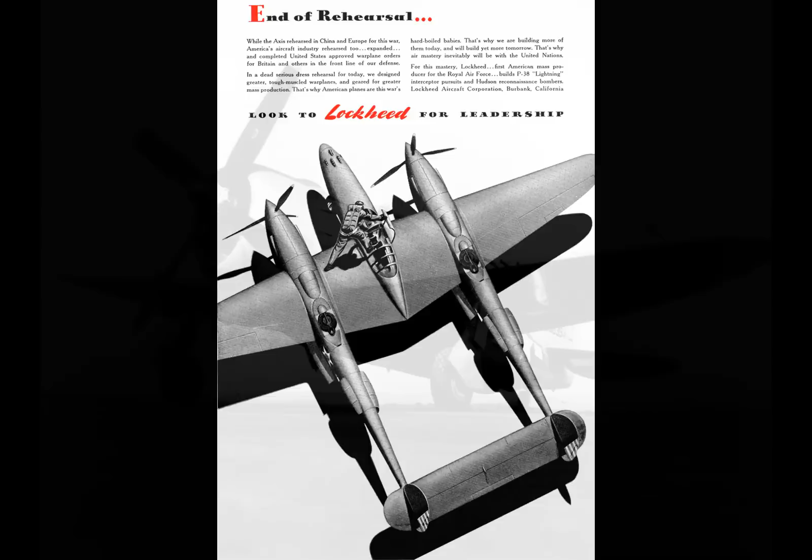The U.S. Army Air Force had numerous fighter planes during World War II, but only 3 that were really capable of escorting the U.S. heavy bombers and taking on the Luftwaffe at high altitudes. The first of these was the Lockheed P-38 Lightning, followed by the Republic P-47 Thunderbolt, and finally, North American's Merlin-powered P-51 Mustang.

Of these 3 airplanes, not surprisingly, the P-38 was the most expensive. The cost alone called into question the wisdom of purchasing the plane once the lower-cost alternatives were proven.

A new P-38 in 1944 cost about $97,000. A P-47, which could do about as well or better in certain roles, cost $85,000. A P-51 in 1944 was only $51,000. Compared with the P-38, the P-51 is almost half the price, with far lower operating costs and easier pilot training.

Thus, from early 1944 on, just the act of buying P-38s could be seen as somewhat controversial. However, it's more than that. The plane had a number of technical issues which added to the controversy. Add in the fact that during 1944, the 8th Air Force replaced all their P-38s with P-51s, and the plane's reputation took quite a hit.

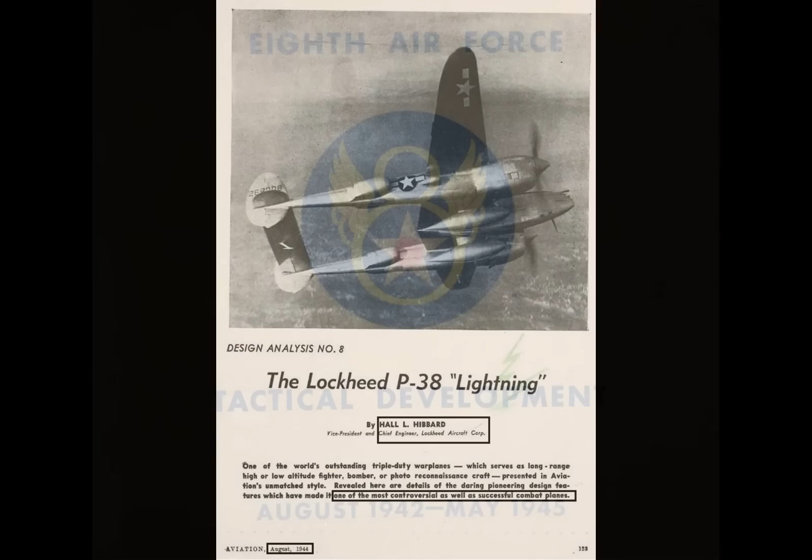Hall Hibbard, the vice president and chief engineer at Lockheed, referred to the P-38 in this article as one of the most controversial airplanes. Take a look at the date. This was in August of 1944, so he wrote this at a point in time when the P-38s were being rapidly replaced by P-51s. The 8th Air Force Tactical Development Book has a chart which gives you a pretty good idea how quickly the P-51s took over the role from the P-38s in that theater.

So all this looks pretty bad for the P-38. It's really expensive, had significant technical issues, something I'll circle back to, and the famous 8th Air Force didn't want them. What's not often remembered is the fact that the Merlin-powered P-51s didn't start operating in significant numbers until early 1944.

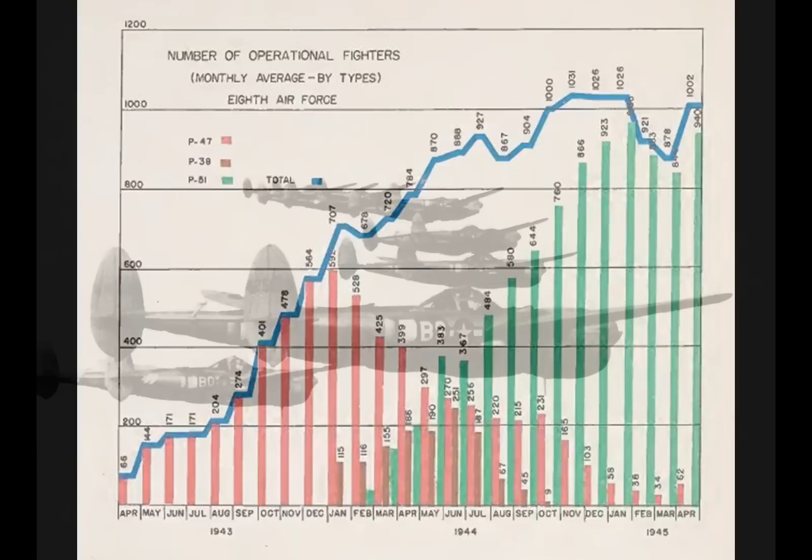They didn't outnumber P-38s in the 8th Air Force until April of that year, only 2 months before D-Day. By that point, the course of the war had already been set. Most turning points in the war happened in 1942 and 1943, and for most of those turning points, the P-38 was there.

During these years, U.S. commanders were asking for more P-38s. So while everyone seems to remember the 8th Air Force getting rid of them, few seem to remember that for most of the war, U.S. commanders were screaming for more P-38 Lightnings.

Hap Arnold was not only trying to get P-38s for his operation out of the United Kingdom, he was literally trying to get every single P-38 that was built. When we combine that with the fact that we know there were P-38s operating in other theaters, I think it's obvious that the individual theater commanders were all trying hard to get P-38s of their own.

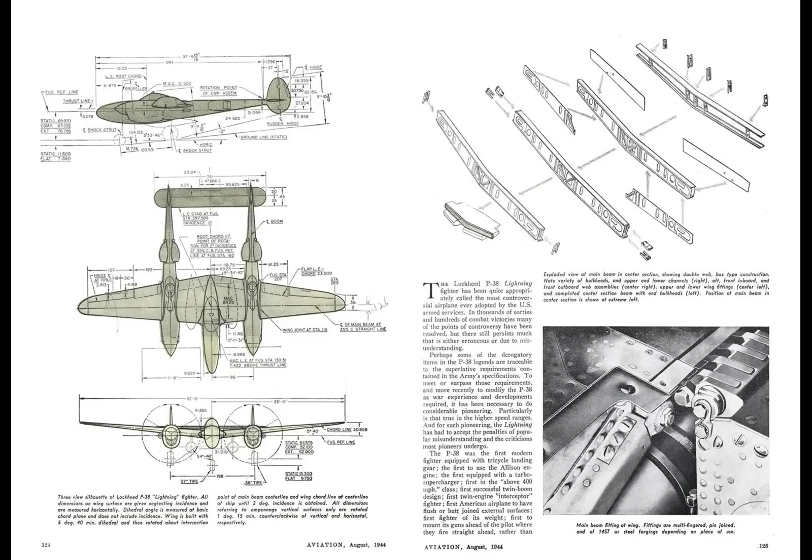Now let's go back to that Hall Hibbard article for a moment. I think he makes some very valid points about the 38's problems. I'm going to paraphrase this, but I'll put up the actual text on screen for you. Let's zoom in so you can pause and read if desired. Of course, this actual magazine and other documents in this video are in my Patreon section in PDF format.

Hibbard is pointing out that because the P-38 was the first fighter to reach 400 miles per hour, and to be capable of high speeds at very high altitudes, it required new technologies and techniques in construction to do it.

It's not unusual for new technologies or techniques to run into technical problems, as well as become a target for undue criticism. First on the list of problems is the P-38's high parasite drag. I talked about this in the previous video on the plane, so I'll just gloss over it here.

The Lightning has high parasite drag as compared with other U.S. World War II fighters. That's because after the P-38 first flew, NACA came out with a lot of new information that benefited the P-47, the P-51, the Corsair, and even the Hellcat. In the last video, I talked about the drag from the turbo installation, the exposed turbo itself, and the collection of related cooling scoops, which are all over the plane.

We also have drag from the wing. The wing was pretty good in terms of induced drag, which helps it at lower indicated airspeeds and in turn radius. But it has a lot of parasite drag, which hurts it at high indicated airspeeds, and that's a big factor at lower altitudes.

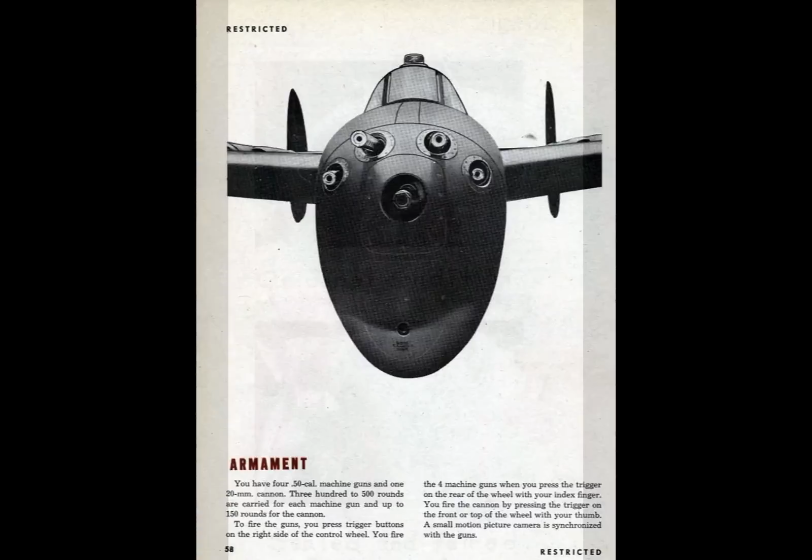We also have some very high drag gun ports. This open gun port arrangement was common when the P-38 was designed, but these cause a lot of drag. NACA figured this out, and the drag from gun ports was minimized on future designs. The P-51's gun ports look a lot like what NACA came up with here, and that's not a coincidence.

Thus, I suppose, rather than saying that the P-38 has high drag, it makes more sense to say that the other planes have lower drag because they benefited from information that wasn't available at the time the P-38 was designed.

That power evens out most speed contests, even down at lower altitudes. It's just that it's not as fast as it would have been otherwise.

As an example, and I'm going to use the P-38G, that plane came out in mid-1942. It was heavily used in the Pacific. It's the variant that got Yamamoto. Commonly used airplane in 1942.

The P-38G's speed at 5,000 feet, which is a low altitude, is within around 5 miles an hour of most anything else that was flying at the time. It's just that the P-38 was using a lot more power to get that speed because of its drag.

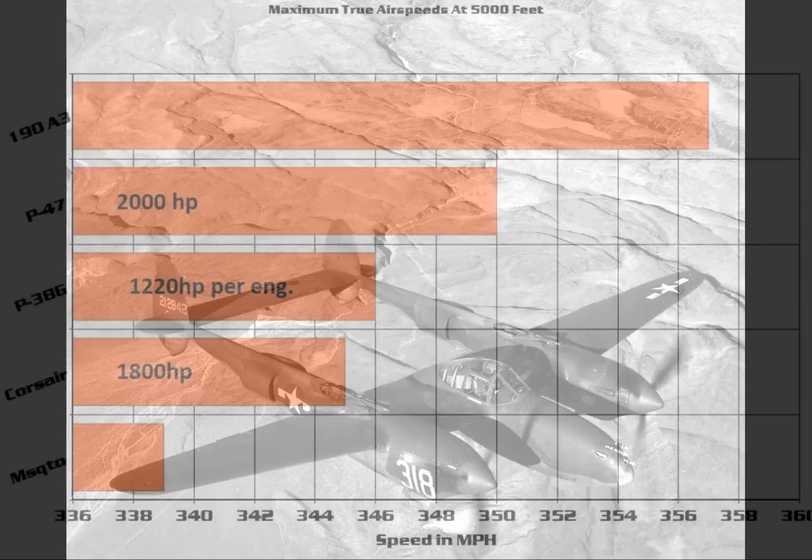To keep things in context, I'll put up a chart I made for a P-38G model versus other 1942 aircraft. Now keep in mind there are later and faster versions of each plane here. I'm trying to put up stuff from mid-1942. At 5,000 feet, all of these planes are pretty close in terms of maximum level flight speeds.

They range from 339 to 357 miles per hour. The P-38, in spite of its drag, sits squarely in the middle of this range, and these are all fast airplanes by mid to late 1942 standards. And again, the 38G we're looking at here came out in July of 42.

The Corsair doesn't quite fit in, as it didn't enter service until very late 42, the 28th of December, but I thought it would make my point pretty well. At 5,000 feet, due to throttling, its 2,000 horsepower engine only has 1,800 horsepower. So I think this perfectly demonstrates the differences in drag. The P-38 needs 640 more horsepower to reach the same speed as the Corsair.

The Mosquito here has the Merlin 21. It is not the later variant with the two-stage Merlin. However, it is representative of a typical Mosquito in 1942. We will get to the dual-stage versions another time.

Let's take a look at speeds at 25,000 feet and see what happens. Up at this altitude, parasite drag is less of an issue because the planes will be at relatively low indicated airspeeds for a given true airspeed. Up here, not many planes can outrun a 38 in mid-42, and no Axis fighter could do it.

I think that's enough about drag. The takeaway should be that yes, it was high, but the P-38 was still pretty darn fast.

Sharp observers probably noticed already that on this chart I show the P-38 with only 1,220 horsepower a side, when the P-38G engines were rated at 1,425 per side. There's a little bit of variation on those ratings depending on exactly when you're looking at it. But this dovetails into the next problem I want to talk about, and it's a pretty big problem.

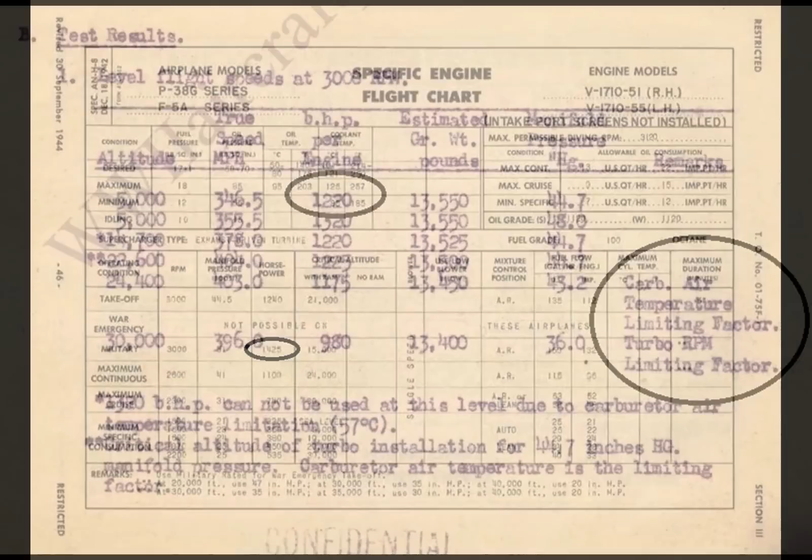In that test, they couldn't run more than 1,220 horsepower without running into carburetor air temperature limits. This problem would affect all P-38s that saw combat prior to the introduction of the P-38J in mid-1943.

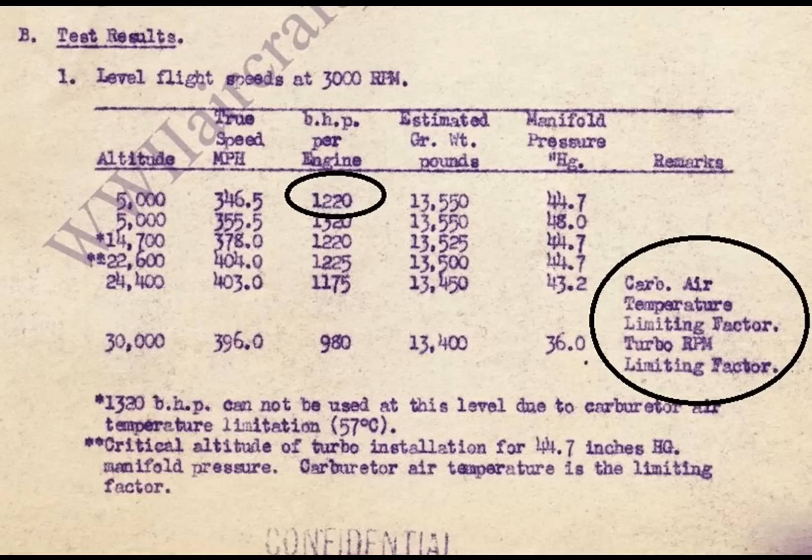Allow me to explain. Air coming out of the turbochargers is hot. I'll be calling that the charge air. It's hot for two main reasons. First, the turbo compresses the air, and when you compress air, it gets hot. The air also picks up additional heat from the turbocharger itself, as the unit is not 100% efficient.

It's a good idea to cool that air back down through the use of an intercooler. Lowering the temperature of the charge air increases its density, and that alone results in more power. Plus, it decreases the tendency for the engine to knock, which in turn allows higher manifold pressure and power for a given fuel octane rating. So, intercooling in a World War II airplane is a pretty important thing.

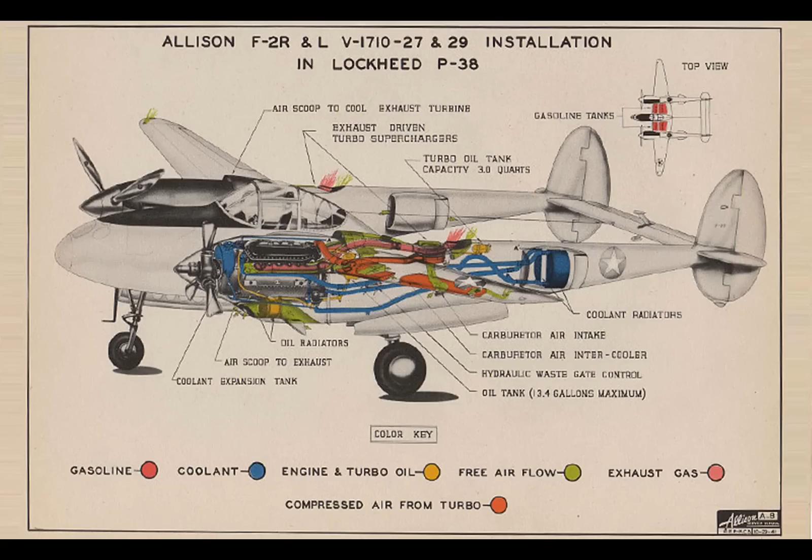The early P-38s have intercoolers built into the leading edges of the wings outboard of the booms. This design is clever because it eliminates the large external scoops that would normally be associated with an intercooling system, thus reducing drag. I think they use the aircraft skin to cool the charge air.

In other words, I think it's a skin-to-air heat exchanger. But I'm not sure of that, and I can't find a single explanation of how the wing intercoolers actually work in any document. But I don't see any external ducting that would support a conventional intercooler, either air-to-air or liquid-to-air. So I'm pretty sure that they use the aircraft skin to cool the charge air. But if anyone knows for sure, please post in the comments, especially if you have a source.

The problem with the P-38's intercoolers is that they were designed for the 1,150 horsepower Allison engine. As they increased power, that was done by raising manifold pressure, and that was the pretty normal way in World War II of getting more and more power out of an aircraft engine. And more manifold pressure means more boost from the turbo, which in turn means higher charge air. The wing-mounted intercoolers just couldn't handle it.

As they were integrated into the wings, making them bigger wasn't really possible without a major redesign. It wasn't only the extra power that overtaxed the wing intercoolers. When climbing, they had another issue.

Now, you might think that as the plane climbs, the intercoolers would have an easier and easier time because the temperature decreases with altitude. However, that decrease in temperature is more than offset by the turbos having to do more and more work to maintain the same manifold pressure because they're starting with thinner air in the first place. Thus, maintaining a low enough carb temperature during a climb and when at high altitude was a problem for the early P-38s. The fact that the original requirements called for operation at 20,000 feet, but the actual needs were to go higher by the time the P-38s entered service, probably didn't help.

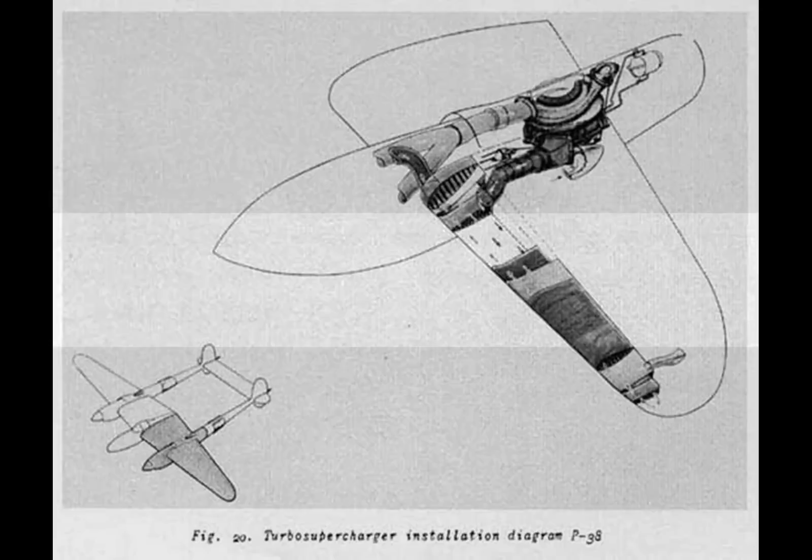The pilot's manual for the P-38H and earlier versions, these are the versions with wing intercoolers, say to maintain a carburetor air temperature below 120 Fahrenheit, or about 50 degrees centigrade. If the temperatures climb to that level and the pilot wants to maintain altitude or continue climbing, he has no choice but to pull the throttles back.

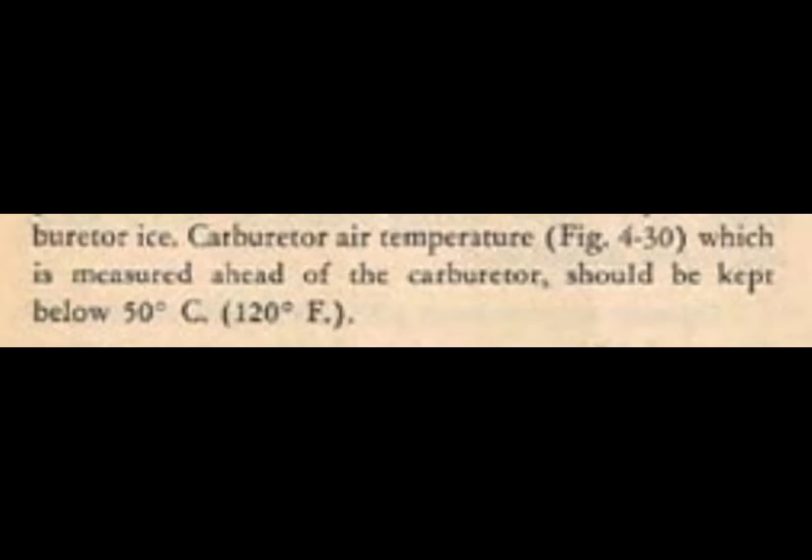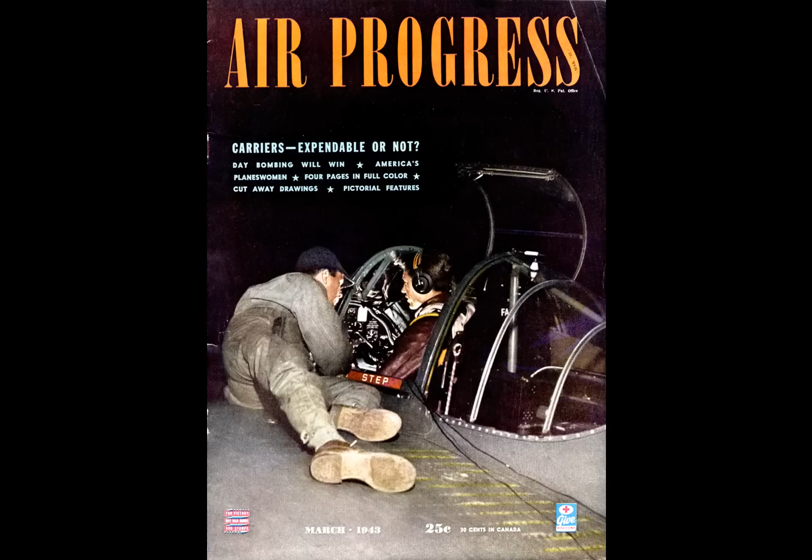There are no intercooler flaps which can be opened more, so other than reducing power or lowering the nose to build up more speed, there's nothing the pilot can do to decrease the temps. This is the reason that most performance testing of the earlier P-38s was done at some power setting below the maximum. They just kept hitting the carb air temperature limits before they could get to the engine's maximum rated power.

In short, it seems that Lockheed used internal wing intercoolers, probably for streamlining, but they were only just adequate for 1,150 horsepower engines. When power went up, they really couldn't do the job anymore, especially when above 20,000 feet. The obvious fix was to put in bigger intercoolers, and that's just what they did. In August of 1943, they came out with the P-38J, which had a conventional air-to-air intercooler located down low in the nacelle and towards the rear of the engine.

It's sort of like a mini P-47 intercooling system on each side. This picture shows the wing intercooler located at position 9 in the case of the wing-mounted units in the older models, and at position 20 for the P-38J and later models.

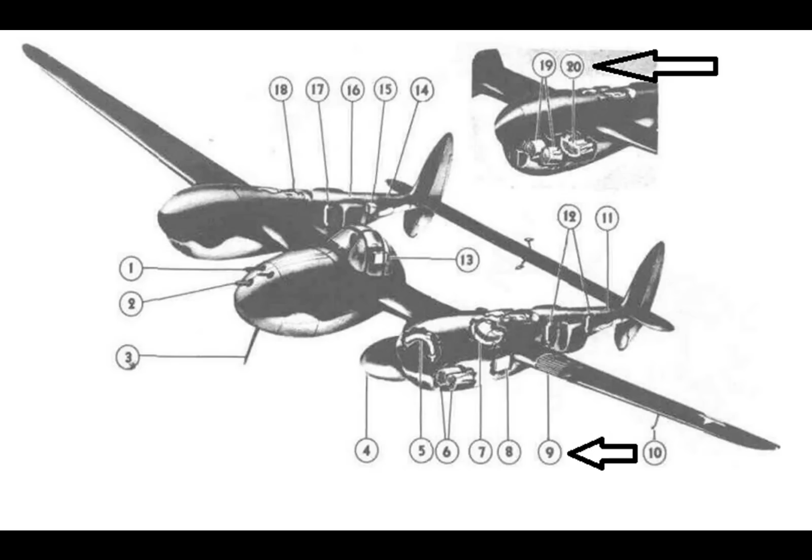This new intercooler configuration worked quite well. It may have reduced the streamlining of the nacelles a bit, but the extra power more than made up for it. The P-38J could run at 60 inches of manifold pressure, giving it over 1,600 horsepower per side, and it could make that power all the way up to very high altitudes. In the event that carb temps did creep up to the limits, the pilot could open the intercooler shutters for even more cooling. Once the 38Js came out in August of '43, the carb air temperature limits were no longer a problem holding back the new P-38s.

To get an idea just how effective the new intercoolers were, let's take a look at the engine performance for a P-38H, which is the version with the older wing intercoolers but the newer turbochargers as used in the later J model. This is about as apples to apples as we can get for a comparison of intercoolers. I want you to notice that this is an H model with a V1710-89 on the right and a -91 on the left. That's because of the different rotation.

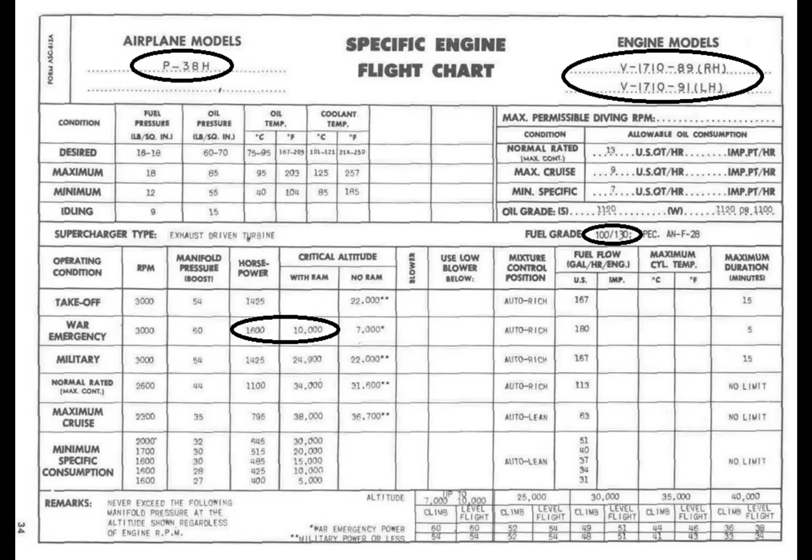We have 130 octane fuel, and the engines can put out 1,600 horsepower, up to 10,000 feet at war emergency power. The same engines in the P-38J, same turbos, can maintain 1,600 horsepower, so the same amount of power, but up to 28,700 feet. That's a lot more than 10,000 feet, and the only difference here is the intercooler.

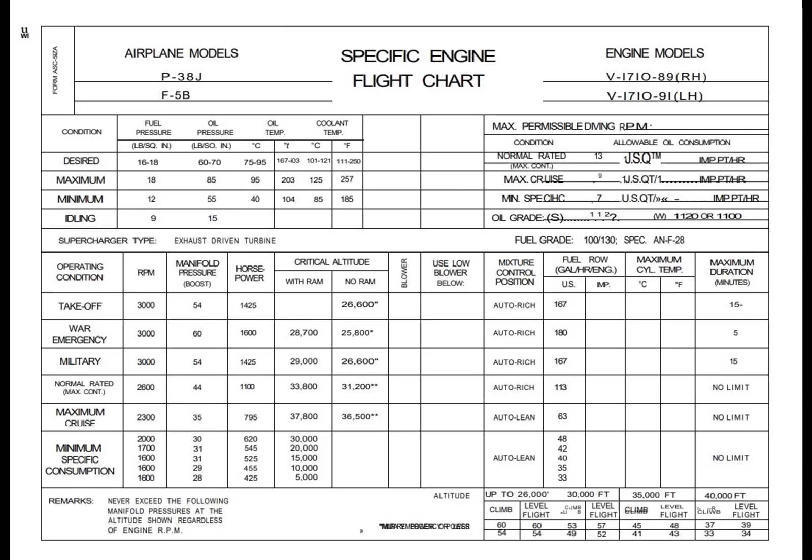Now this dovetails into another early problem P-38s had, and by that I mean the F and G models. They didn't have enough turbocharger. Take a look at the data for the G model. Its turbocharger can provide enough air to reach 1,425 horsepower per engine at an altitude up to 15,000 feet. At 24,000 feet, it's down to 1,100, and at 30,000 feet, 740.

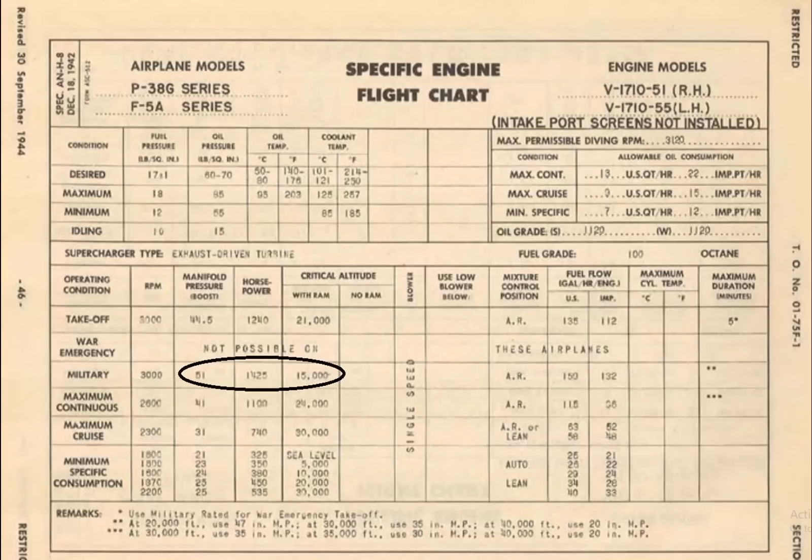That was fine in the Pacific, where most of the fighting took place below 15,000, but it really wasn't going to cut it over Fortress Europe up at 25,000. In order to be competitive with the Luftwaffe and escort the U.S. heavy bombers over Fortress Europe, the P-38 was going to need more power at high altitudes.

So starting in May of 1943, with the introduction of the H model, or possibly sometime during the H model's production run, they switched to a newer, better turbo, and the H model could maintain 1,425 horsepower up to 24,000 feet, so that's a lot better. But of course, it could only do that if the carb air temp stayed low enough, which they usually didn't. Thus, the H models were a relatively ineffective stopgap airplane between the Gs and the Js, and they were pretty quickly replaced by the J models with their much better intercoolers.

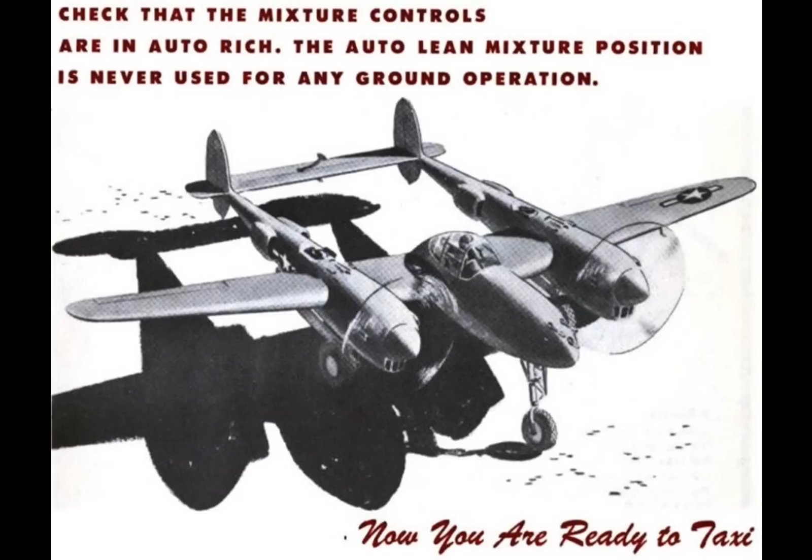The J models had those intercoolers, we'll call them chin intercoolers I guess, and they were a huge improvement. It could maintain 1,425 horsepower up to 29,000 feet, and more importantly, it could really do it in the real world. All these earlier models would typically run into carb temp issues, and that would prevent them from reaching their maximum rated power levels, as seen repeatedly in test data. The J model was the first one to have both enough turbocharger and enough intercooler to actually use the power.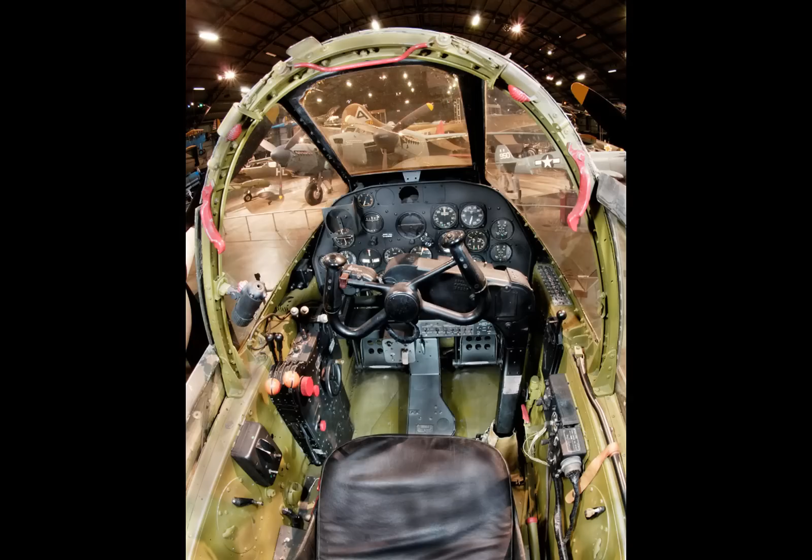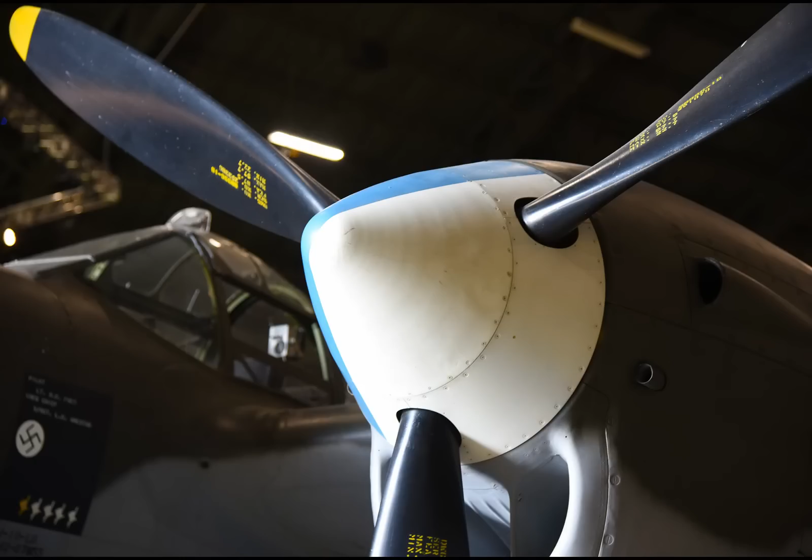This is part of the reason that with the 8th Air Force over Europe, the P-38 didn't enjoy the same level of success it did in the Pacific and the Mediterranean. There was no fighter version of the P-38 they could really use until the J model, and that didn't come out until August of 1943. The 8th didn't get them until January of '44. That was bad timing because at that point the Merlin-powered P-51 was about to come on the scene, and it could do the same job in terms of escorting for a far lower price.

So far we've covered 4 problems with the P-38. All of them were pretty serious. It was really expensive, had high drag relative to the later U.S. fighters. It didn't have enough turbocharger, and it didn't have enough intercooler.

The problem of expense was never solved. The turbocharger issue was solved starting with the H model via the newer, better turbo, and that turbo was really able to shine when the intercooling problem was solved with the introduction of the J model. The high drag probably got worse with the J model, but it had enough power to make up for it.

The Js were faster than any previous version, and they had a usable 1600 horsepower per engine versus power as low as 1150 in some of the earlier models. That brings us to the next problem.

When you add that much power, you're likely to need a new propeller design. They had increased power almost 40%, but hadn't added a new propeller. For comparison, when the P-47 went from 2,000 to 2,300 horsepower, they added the new paddle-bladed props, which were a big key in taking full advantage of that extra 300 horsepower. The P-38 had a much larger gain in power, but no new propellers.

Of course, there was a fix for that, which was to install new Hamilton Standard hydraulic paddle props. These were tested on modified P-38s and intended for a plane that was to be called the P-38K, but only 2 were ever built. They bumped up power even more than 1,600, all the way up to 1,875 horsepower per side. And with the new paddle props and 1,875 horsepower per side, the P-38K could outperform any other U.S. fighter in terms of climb and speed at the time.

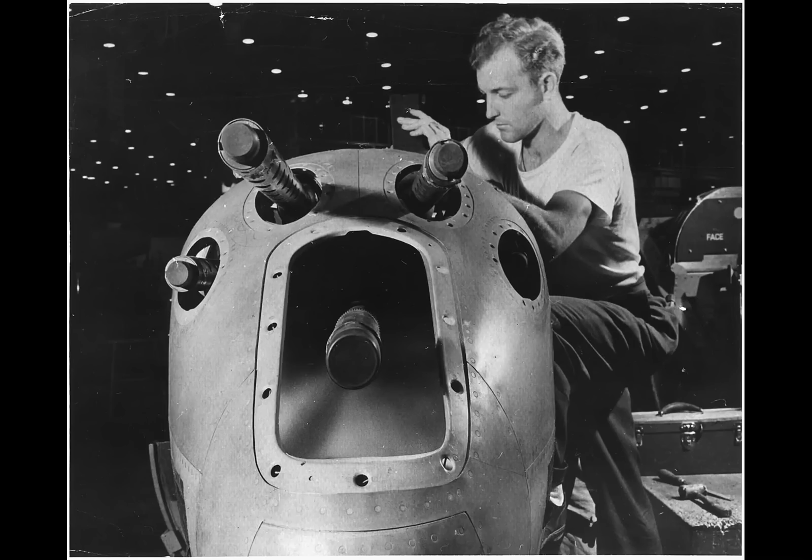The powers that be decided not to put the P-38K into production. So the P-38 soldiered on through the entire war without the benefit of paddle props as used on the Thunderbolt, and similar to what was used on the Mustang, and thus it never really had the performance its 1,600 horsepower engines could have given it, let alone 1,875 horsepower engines. There was testing done at 2,000 horsepower, but that would have been pointless without changing out the props.

So it's just a point of interest there. The P-38 never really got the propellers it needed to exploit even at 1,600 horsepower, let alone the power capabilities of the Allison beyond that.

One of the most famous problems of the P-38 was its relatively poor dive performance. The P-38 had a maximum dive speed of 420 miles per hour indicated, according to the pilot's manual, and a Mach limit of 0.68. It's the Mach limit that's the real problem here, although that 420 mile per hour indicated speed is not great, but the Mach limit is the bigger issue, as that's going to be a big factor at high altitude where you'll reach the Mach limit at relatively low indicated airspeeds.

When the plane reaches its Mach limit, it encounters compressibility and becomes uncontrollable. It's possible to recover the plane from this if there's enough altitude, but it's very risky to get into compressibility in the first place. This is one of the problems that really wasn't Lockheed's fault. The P-38 was the first fighter to fly fast enough and high enough to encounter this issue.

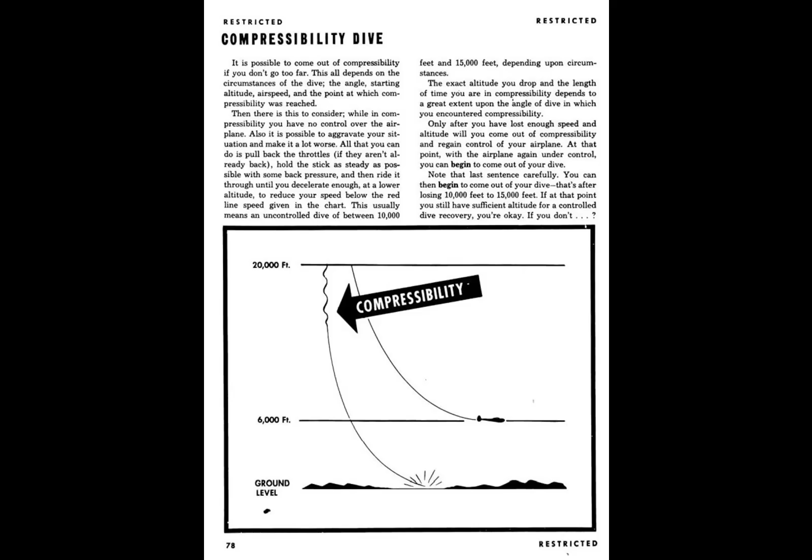It affected all World War II fighters with similar performance to one degree or another. Lockheed's P-38 design team just happened to be the first people to run into this, and they lost some test aircraft and pilots because of it. They couldn't avoid the problem in the first place because they didn't know it existed. Subsequent designs like the P-47 and P-51 had improvements and higher Mach numbers, typically around 0.80.

This didn't matter too much in the Pacific for 2 main reasons. First of all, the Japanese planes didn't have stellar dive performance either, so the 38 could still outdive most of them. Additionally, operations in the Pacific tended to be at lower altitudes, where Mach limitations were not a factor as often, because the plane would usually reach its red line of 420 miles per hour on the airspeed indicator, thus its structural limit, before it would reach its Mach limit.

But over in Germany, at high altitude, totally different situation. When escorting at high altitude, the planes are operating pretty close to their Mach limits and are much more likely to get into compressibility if they dive. There's another factor here that's almost never mentioned and isn't well understood, and that is that the speed of sound varies with temperature, not specifically with altitude. There's confusion about that, but aerodynamics for naval aviators is very clear about this. The speed of sound varies with temperature. Now, it's much warmer in the Pacific.

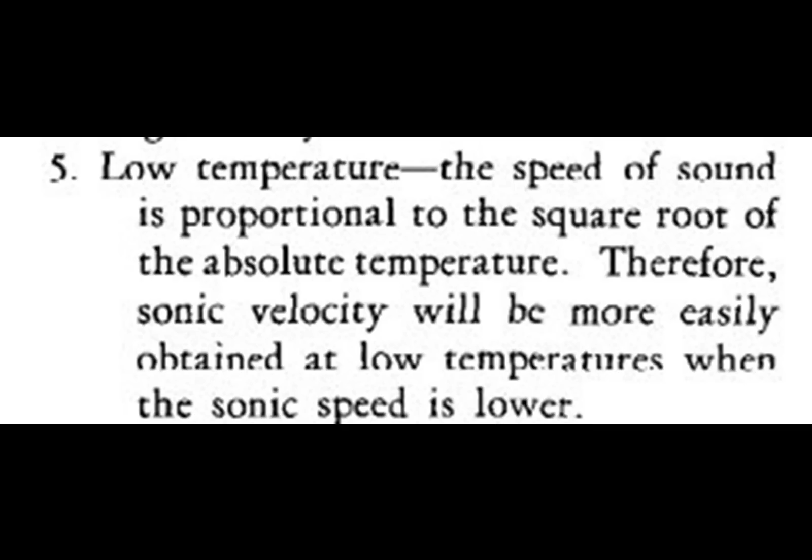Which increases the altitude at which the plane's Mach limit becomes a factor. So let me put all this into perspective for you.

In the standard atmosphere, the P-38 will always encounter its airspeed limit, thus its structural limit, before its Mach limit when below 12,000 feet. Thus, at an altitude at or below 12,000, as long as the pilot doesn't go above 420 miles per hour on the indicator, he will be fine. However, above 12,000 feet, the plane will encounter its Mach limit below the red line of 420, so he must use extra caution and adhere to the speeds shown on this chart.

Looking at this chart, we can see that up at 30,000 feet, 290 miles per hour indicated gives us 440 true. Since the speed of sound is relatively low up there, that puts the true airspeed pretty close to the plane's Mach limit of 0.68.

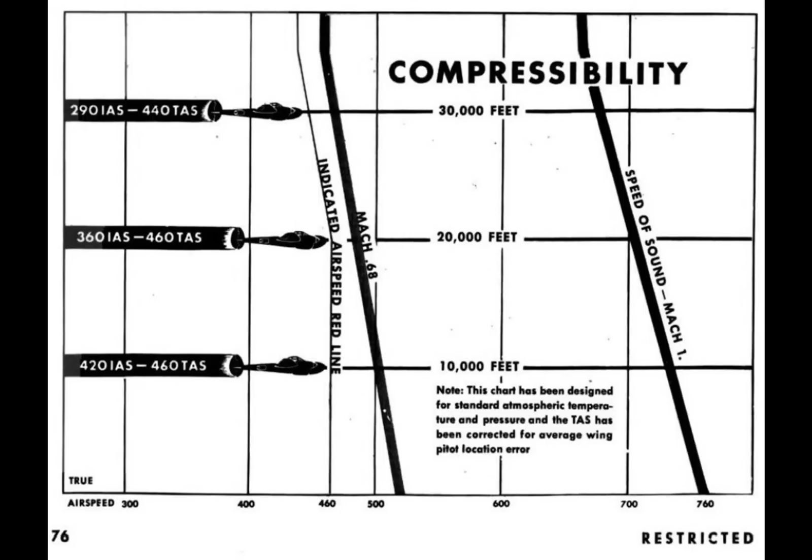And of course, over the Pacific, you would encounter these Mach limits at higher altitudes than standard. The chart is shown in the standard atmosphere. And over Germany in the winter of 1943, you're going to encounter these at lower altitudes. So this is a really significant difference between the European and Pacific theaters. Thus, in the Pacific, where most of the action took place at lower altitudes, the P-38's Mach limit just didn't come into play nearly as often as it did over Germany on escort missions.

This was further complicated by the fact that the mission of the U.S. Army Air Force in Europe was not to bomb German industry into oblivion, as most people think. That was a secondary goal. The primary goal was to destroy the Luftwaffe so that it couldn't oppose the D-Day landings. I have incontestable evidence of this in my P-47 Part 8 video, so I'm not going to go over it all here again, but that video is up if you want to watch it.

In order to destroy the Luftwaffe, they of course had to shoot down planes and kill pilots. That would be hard to do if the Germans could simply disengage by diving away, which they could when fighting P-38s. Both the 109s and 190s had Mach limits of 0.75 or better. The 38 just couldn't follow them down in a steep dive from 25,000 feet. This was well understood by General Doolittle and others, so the P-38s were really not well suited for the 8th Air Force's needs in 1944, and the clock was ticking.

D-Day was coming, and the P-38, while a capable airplane, wasn't really the right plane for the job, that is, the job of escorting high-altitude bombers over Europe. And the dive limitation was probably the single biggest part of this, although there are some other things that are pretty big. Now, not to be deterred, Lockheed came up with what I'll call a partial solution to this problem.

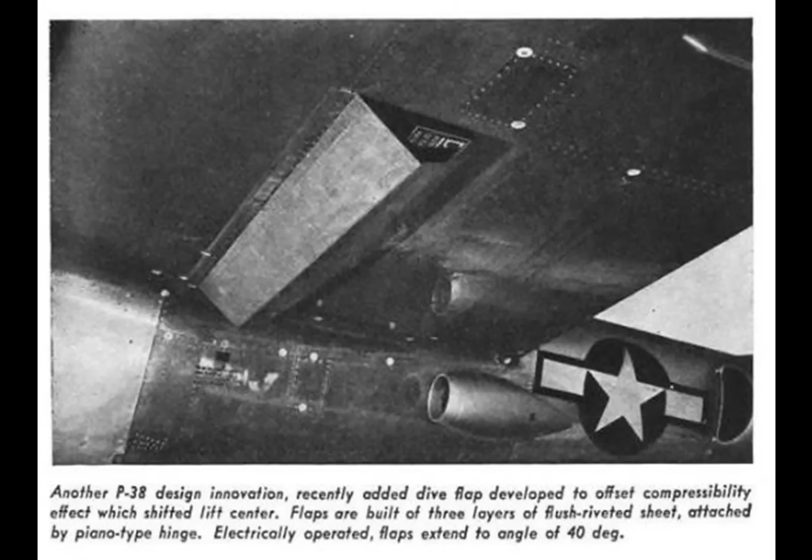These are the dive flaps. When at or above the Mach limit, compressibility causes two big problems. First, it tends to lock up the controls. They become immovable. Second, the center of pressure on the wing moves aft, causing the plane to pitch down. So we need to pitch up and slow down. The dive flaps solve both of these problems. They help the plane pitch up, which by itself also helps slow down, and they add a lot of drag, which slows the plane down as well.

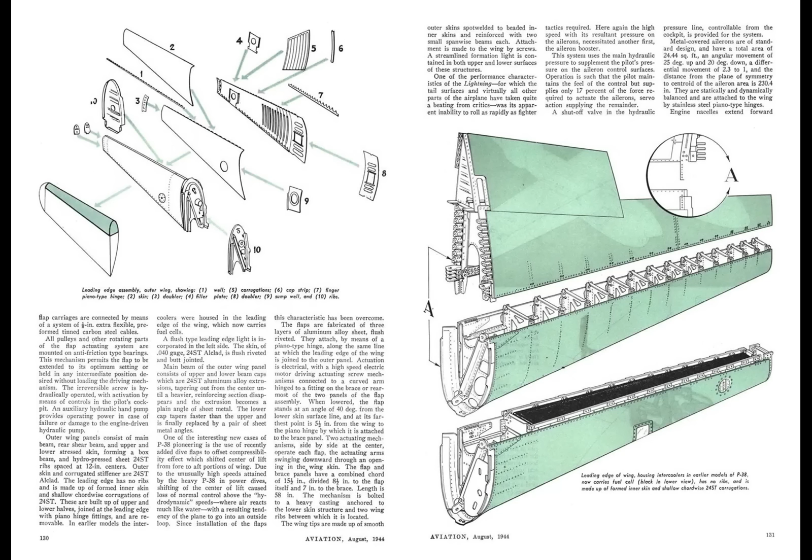The dive flaps were a great addition to the P-38, however they didn't show up until the J model, specifically the J-25 and later airplanes. Lockheed made kits to retrofit the older models already in Europe and packed them into a C-54 and sent them on their way. The British shot down that C-54, thus most P-38s in Europe never got the dive flaps, and by the time they could have, the decision to replace them had already been made.

And as I said earlier, the dive flaps were really a partial solution anyway. It does make the plane recoverable and gives pilots more confidence in pushing up against the Mach limit, but the FW-190s and 109s would have still been able to dive away from the P-38, so this wasn't a total solution.

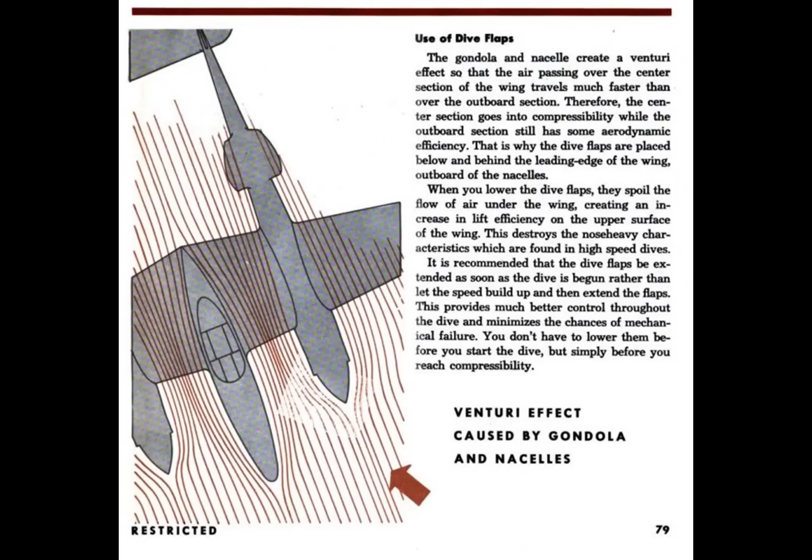Now, those are all the P-38 issues I'm going to cover for now, but there are quite a few more that I'll talk about in the next P-38 video, and some of those are pretty darn big. In summary, we talked about drag, inadequate turbos, inadequate intercoolers, and a low Mach limit. The P-38's drag was about as good as it could have been for a plane its size designed in 1937.

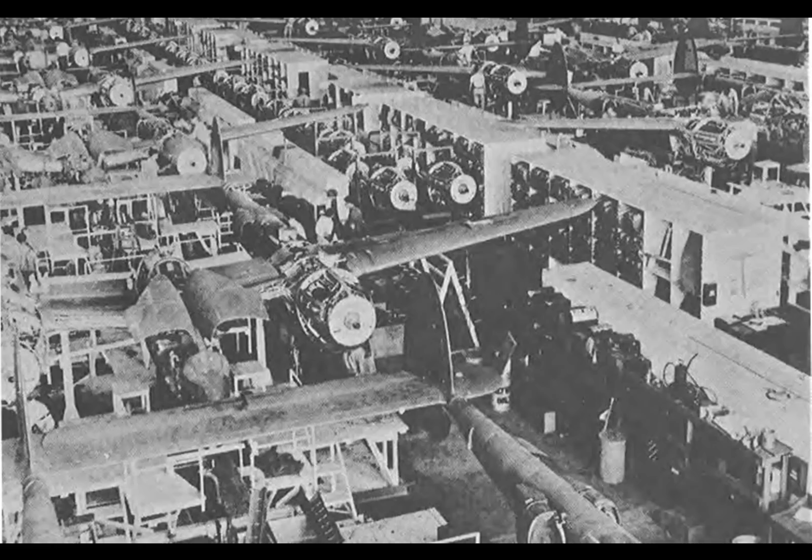It's only high relative to later U.S. fighters because they benefited from later information from NACA. The P-38 was built with flush riveting and butt-jointed panels and had a very streamlined cowling setup. Of course, it lost those streamlined cowlings later when the chin intercoolers were installed.

The turbo and intercooler issues sort of go together. As designed, the plane was fine. It could easily exceed the original design requirements. However, when pushing the power up to 1,400 horsepower, or even much beyond the original 1150, the intercoolers just weren't up to the task. Likewise, the turbos were fine in terms of meeting the original requirements and climbing rapidly to 20,000 feet, but they just didn't have enough for the power requirements at 25,000.

It's easy to blame Lockheed for a lack of foresight on this one, but we have to consider some things. Turbochargers were still in their infancy. This was Lockheed's first military airplane, designed at a time when military aviation, turbochargers, and engines were all changing rapidly. Looking at military aviation in 1937, it would have been hard to foresee what it looked like in 1944. I think Lockheed did a decent job here with the knowledge they had at the time, but they didn't foresee the improvements in fuels and turbochargers, so when more power became available, the 38 didn't have the intercoolers needed to take full advantage of it. They corrected that with the J model, but it was just a little too late for the European theater.